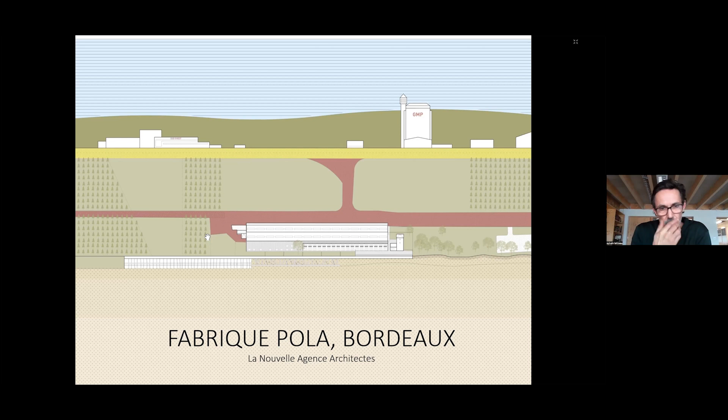So first, a word about the structure itself. The Fabrique Pola was founded in the early 2000s by a group of artists. It's a resource center to promote and develop the arts in the region of Nouvelle-Aquitaine. In 2019, after 6 different locations, getting bigger every time, we moved to a permanent location, the Garonne warehouse.

Which we renovated, and which is located alongside the Garonne, the big river that goes through Bordeaux. Here you have a few of the people who are in Pola, but we are now about 120 in the building.

Fabrique Pola is a non-profit organization, created by and for the artists of the community. The team works at producing, creating, training, and exhibiting in this space, which is a kind of cultural center involving the public and a space dedicated to the professional structuring and promotion of visual arts.

So today, this is a more accurate view of the situation as it is today. The city has been reclaiming the riverbanks for maybe 20 years now. On this side of the river, we have a big park going all along and connecting to the new bridge, which was inaugurated 5 or 6 years ago.

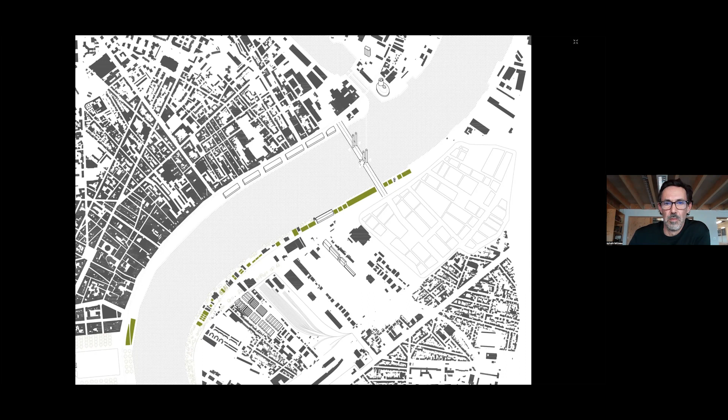So there's a big promenade on both sides of the river, and our building is right here, ideally situated on this kind of tour that lots of people in Bordeaux just walk around.

In the Fabrique itself, we have lots of what we call structures, which are mostly associations. They're all involved with visual arts, and they are part of the structure permanently, so they make all the decisions together. I say they, but we are part of it too, for 16 years now.

We also have a certain amount of artists who use the facility for periods of time, depending on their project, for a few months or sometimes up to 3 years.

But we actually found ourselves this big warehouse, very simple, that was supposed to be demolished, so we saved it from demolition. It's a very simple square building which was only used for storage, and which is a kind of perfect support for the kind of project we were doing inside, because it's a very simple, repetitive structure.

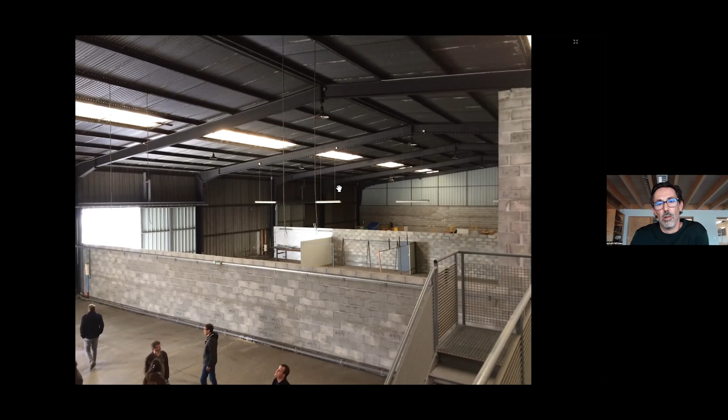Every 8 meters, there's a big beam and column like that. So we were able to program everything on that very simple structure, which we can see here again.

At the end, we decided to put 2 levels of offices for all the structures on the river side, which is not north, but almost. So it's really good for work and all that, and it's not overheating.

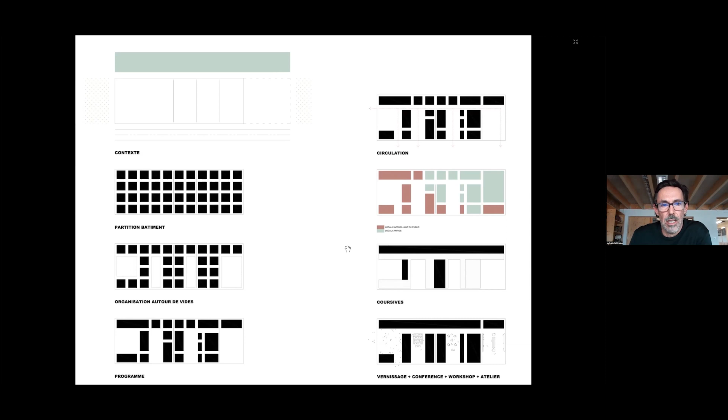On the other axis, we created a succession of voids and filled-up spaces to accommodate different parts of the programs that I'll explain later. So basically this sums that up. We wanted to bring people to see what's going on inside, have a porosity on the facade where people walk along, and on the river, just have the views for everybody and the working spaces.

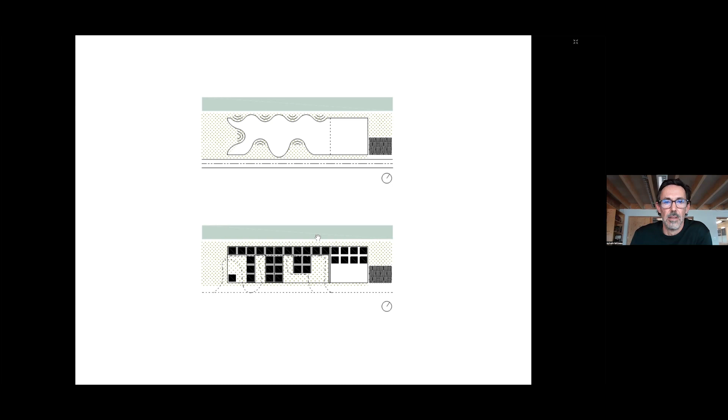This is the end plan, but you can see how, what I was saying before, quite clearly. All the big offices for the structure are on this side, and we have some inside streets on the other direction. Basically here we can see that the simple structure I was talking about is always there, very visible, and we built boxes inside of that.

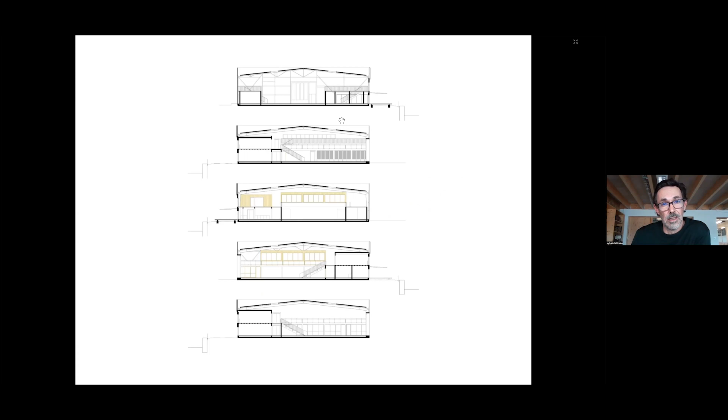Because of course we cannot heat up the entire space, all the offices and working spaces are heated in boxes that are built inside that big box. The rest, you'll see on this axonometric, are very big circulation spaces and multifunctional spaces that people can occupy in different ways.

And so we have the offices on the riverside, as I said, and the other spaces are structured from most public use to most private use. We start up with a big garden that we use a lot, and gives a terrace on the Garonne. Then in the first part, which is very public, we have a restaurant underneath, an exhibition room, a second smaller exhibition room, and kind of a little boutique that sells stuff that people make here.

Then we go to that second part where we have a big tribune, a seating space where we can—it will be clearer with pictures later on—but where we can have conferences and concerts and happenings and stuff like that. Then in the third part, with this street, is where all the artist studios are located. And in this last part is the big workshop of the factory, because there's lots of things being produced here.

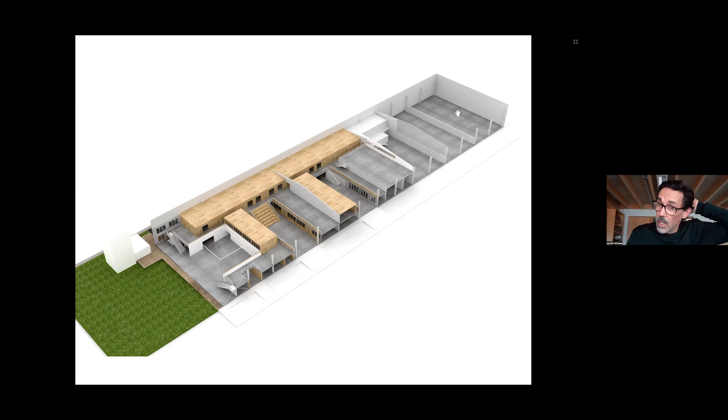At the time of this part of the project, we were not able to build in this last part. But since then, we've acquired it, and we are now working on the project to extend it into the entire building. I'll show some images of that at the end of the presentation.

So I'll come back to the axonometric. What we basically did is build everything inside, as you can see here. And so we needed to make a few changes on the outside to change the status of the warehouse to something else, but keeping in mind that we did this for a very little amount of money.

The first phase of the building develops 4,000 square meters of space that we use, and we did that for a little bit over 2 million euros, 2.2 million euros. So basically around 500 euros per square meter.

So we did as little as we could on the envelope, because that is always very expensive. But we changed the whole facade on the Garonne side, which I'll show later. And on the other side, we made big openings to suddenly give the opportunity for the people walking alongside the building to see what happens inside.

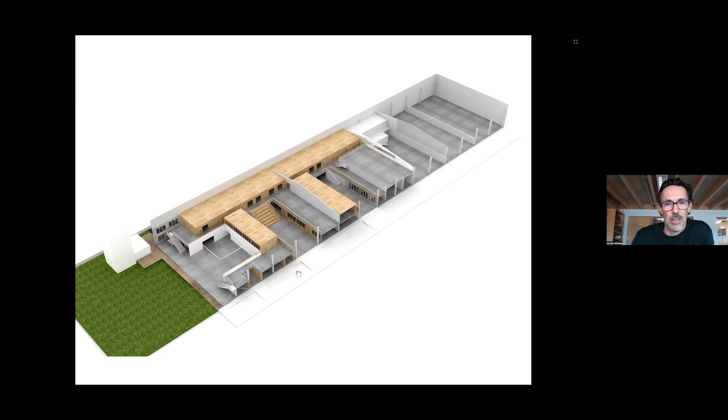So these big doors, which are really every time big, 5-meter high doors—we can enter trucks and stuff like that, get pieces in and out, lots of things that we need to move in and out of the building—and this gives a clear view on the inside for the people. So this is it.

And every time we have such, what I was calling before, the inside streets, the other sequences in this direction of the building—you have one big door like that that gives the light, gives the view from the outside, and enables us to do logistics.

So you can see when stuff is happening outside. These doors are very often completely open like that when there's something happening in the building and people are coming, or when we work on a daily basis they are closed, but they give lots of light on the inside spaces. So we have also some on the garden.

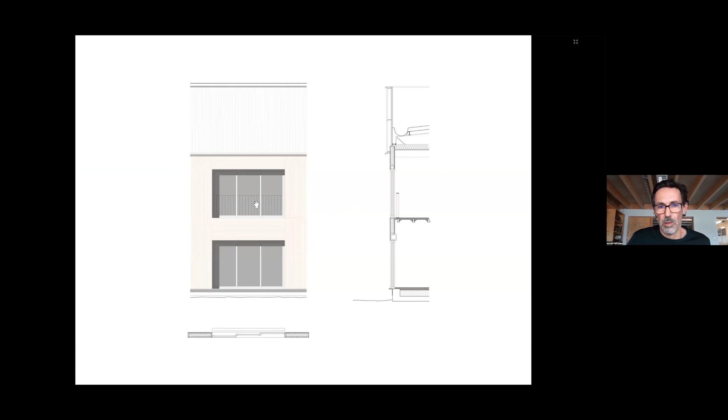Here we can see behind everything is open, and the building is very transparent, let's say. On the Garonne side, we really took off the entire facade and replaced it with a succession of big windows. Every 4 meters, there's a 3-meter window on each story, and this enabled us to put all the big offices for all the structures that work here, so they have the nice view that I have right now in front of the river.

We were very lucky with this building because this side is the north side, so there's no problem, no question of overheating. We can also open the windows very wide because we have 500 meters of river before the other side, so we don't even hear the traffic and cars of the city. It's very quiet. Since this building is very low tech, we heat the working spaces—we don't have air conditioning or stuff like that.

So with the big doors we saw before on the other side and all these windows on the riverside, in the summer when it's getting warmer, we can open lots of windows and have the air moving, and we managed to have good working conditions but with a very low-tech building. So this is the facade on the riverside, and the terrace we had before.

Since then, we've made a bigger terrace. It's different now, but I didn't have time to put a photo—next time, maybe. You can see the view we have on the city, which is pretty nice.

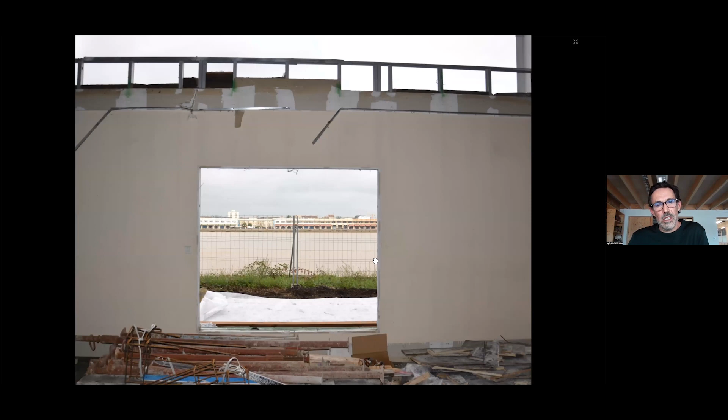So when I was saying it's a very low-tech building, we really started to break off everything where we were inside. Those were good moments of the building process, when we took off the entire facade on the riverside, for example—they were pretty good moments.

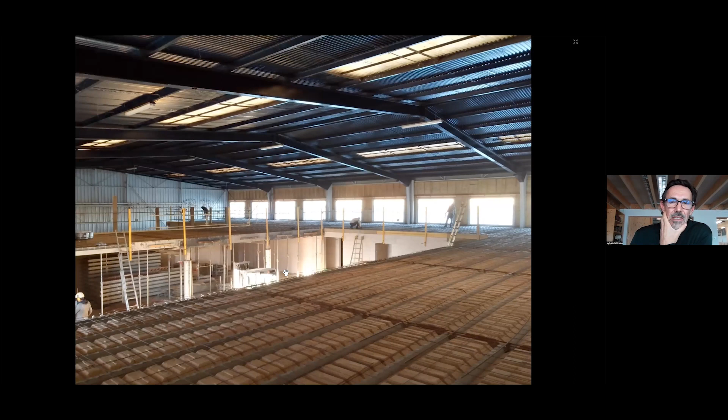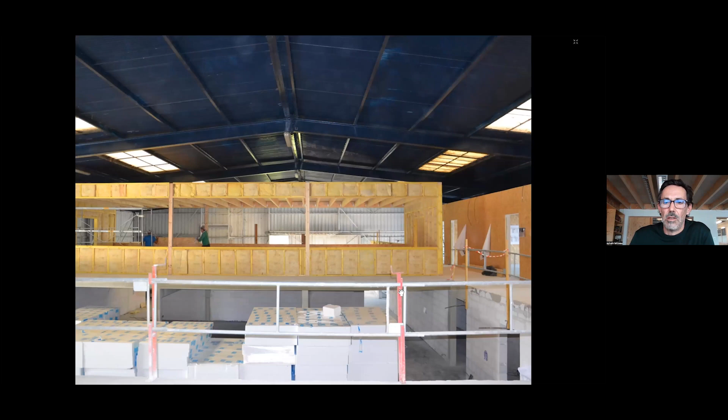After that, we really built inside with a very simple system. Everything on the ground floor is cellular cement blocks, and we built a concrete floor for the first floor to deal with noise and all that. On the second story, we can see it here pretty clearly—everything built on top of that is a wooden structure. I'll come back to this picture.

Here we see it from the top. We also found and chose a few structural elements which are very cheap and very nice, that we weren't able to use before in more regular projects, let's say.

This is a floor system made here in France to build garages in little suburban houses. Usually it's not seen unless in a garage, otherwise there's a ceiling under it, but it looks like that. It's little concrete beams with wood—I don't know how to say that really in English—but we pour the concrete on top of that. So we used that in the entire building.

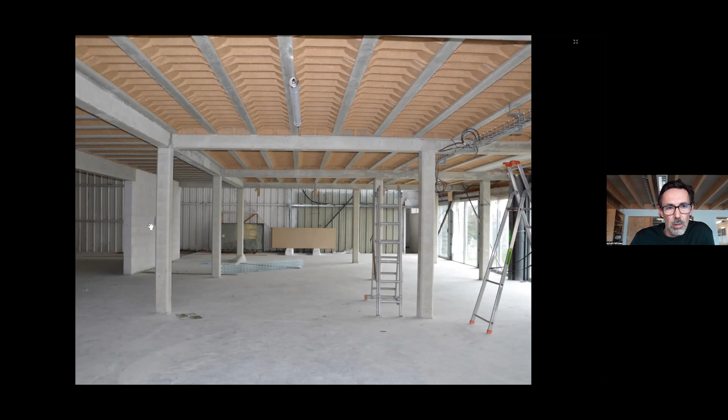You'll see later on when we stroll inside the building with pictures how it looks in the end. This created an atmosphere on the first floor which is lots of white, gray, wood and concrete, let's say, and on the top floor, a 100% wood structure building. This is the construction site.

This gives, of course, onto the terrace on the riverside and onto the garden. It's a restaurant that we use for ourselves, and people can come as well and eat if they want.

Then the second space, the first inside street, is the one where we have lots of equipment that enables us to have conferences, concerts, and all that. On the sides are offices used by lots of structures working here, with people coming for workshops and stuff like that—so that's mostly what happens in this place.

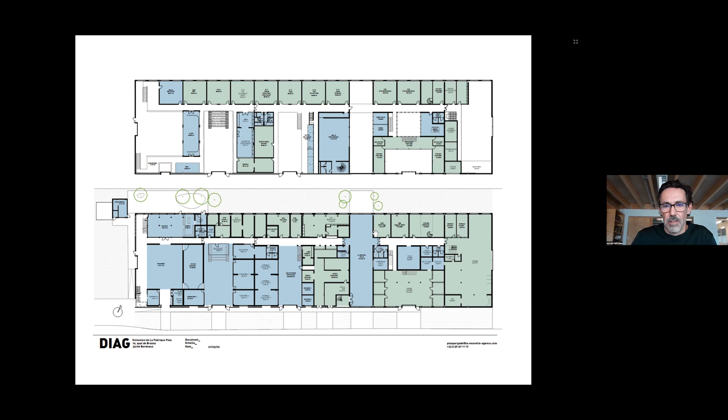We don't really know yet what will happen—lots of different things. And this big square is going to be completely orientated toward the artists who are living in the factory, so these are only artist workshops.

So here we can see this is the new part: there's the big inside street open space, the workshop at the end, and these are all artistic workshops.

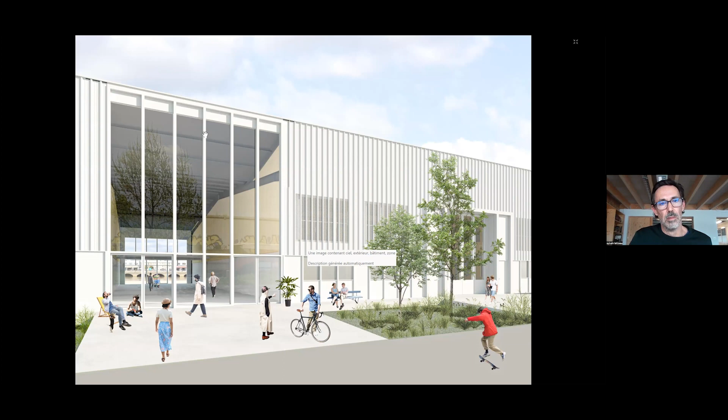We also probably are going to be rebuilding the tower that we saw in the garden, which will have a few nice, we hope, residency spaces for artists, with a view of the whole city. We'll also renew the bar as well.

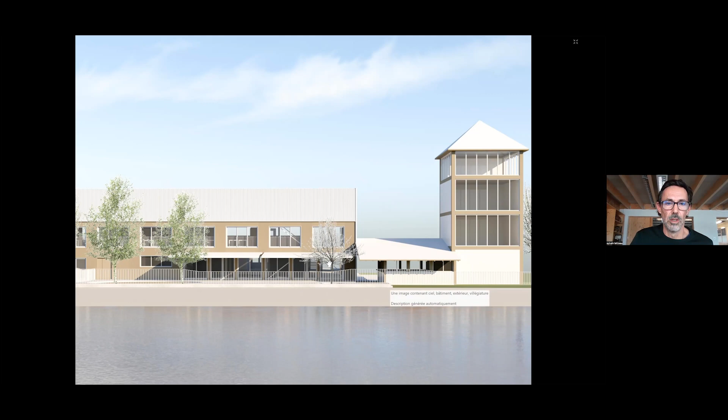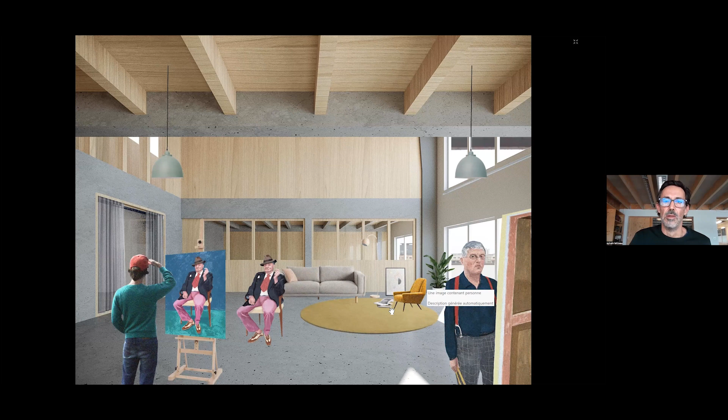And this is one we call the small workshop, for artists sharing the space. This is the big one, for 12 artists sharing the space. Every time they have a little private office, and they can work in a larger collective space.

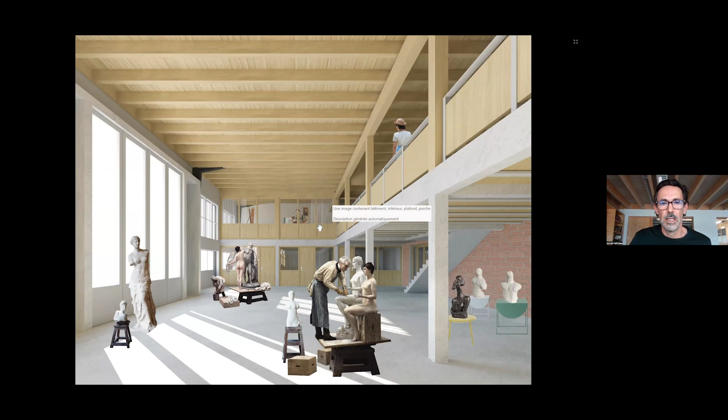This is another place inside what already exists, but we're also putting new pieces into the existing project. And this is the big empty space, which is 250 square meters, where we can do lots of different things—we'll see when it happens.